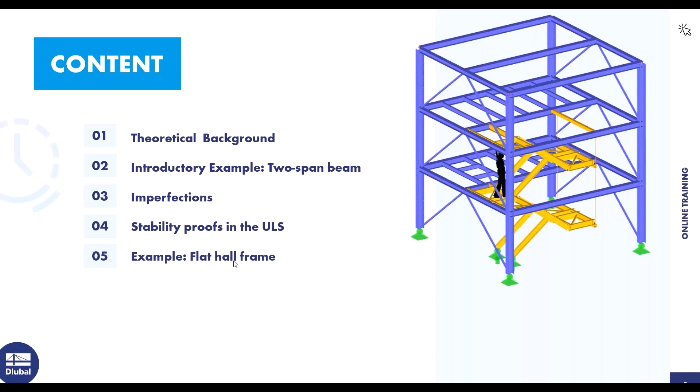That's the content today. At first, I say something about the theoretical background. Then we turn to an introductory example, a two-span beam. Then the next point is imperfections. Then stability proofs in the ultimate limit state. And then we turn to a second example, a flat hall frame. So, okay.

At first, I say something about the products for the design according to EC3. The most important add-on is the Steel Design add-on. With that add-on, you can design steel members according to international standards like Eurocode, AISC, and so on. We design according to Eurocode today. Then there's the add-on Torsional Warping. With that add-on, you can consider the 7th degree of freedom, the torsional warping.

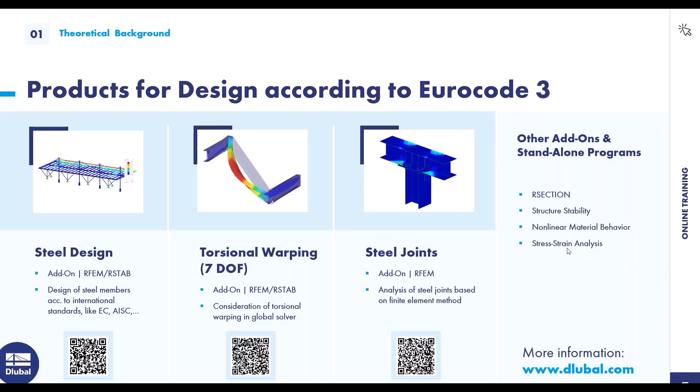Then Steel Joints. With that add-on, you can analyze steel joints based on the finite element method. Then there's the cross-section program, RSECTION. Then the add-on Structure Stability. We use that add-on in the second example. Then there's the add-on Nonlinear Material Behavior. You can, for example, consider a plastic design of steel plates and so on. And then there's the add-on Stress-Strain Analysis.

Okay, then a little insight into the whole safety concept in steel construction. The actions should always be smaller than the resistance. Those are the actions. This is the resistance. And in addition, we have certain coefficients that we have to take into account depending on what type of proof is used. You can see the different coefficients here. And those are the coefficients for the German national annex. And you can see there is for the stability analysis another coefficient, the safety coefficient. But if you select the German national annex, for example, or another national annex, this coefficient is considered automatically by the program. It's automatic. So, okay, then the next slide.

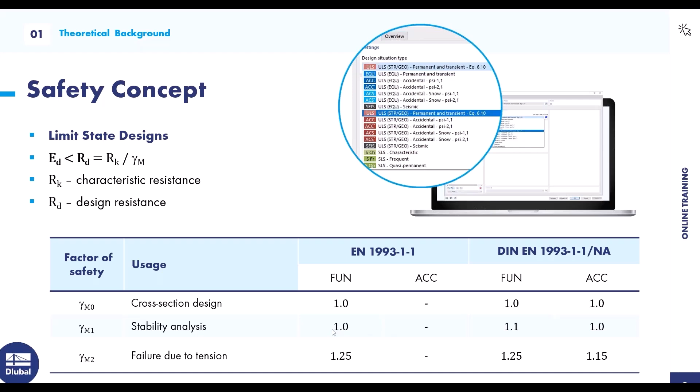Elastic or plastic global analysis. Whether an elastic or plastic calculation is possible always depends on the cross-section classes. There are 4 cross-section classes. The first cross-section class has a high rotational capacity, and this allows a plastic structural calculation. For example, you can consider plastic hinges, but it's not so often used in practice. And the cross-section resistance can be applied plastically.

Cross-section class 2 has a low rotation capacity; this allows an elastic structural calculation. And as with cross-section class 1, the cross-sectional resistance can also be applied plastically. In the first and the second cross-section class you can consider a plastic cross-section resistance. Then cross-section classes 3 and 4 allow an elastic structural analysis, and the cross-sectional resistance can only be applied elastically. For cross-section class 4, only a reduced cross-section resistance, the effective cross-section.

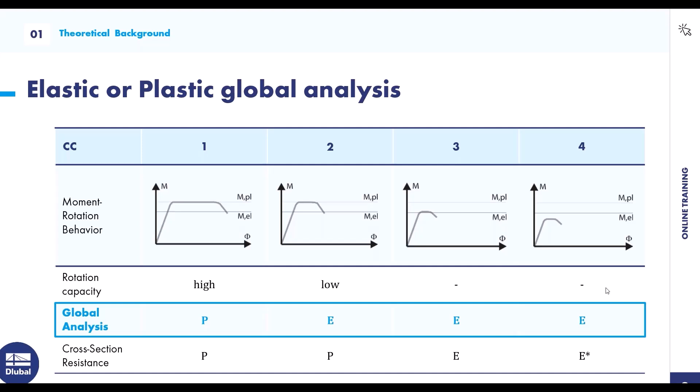That's the first example, the two-span beam, with a field length of 12 meters left and 12 meters right. A beam IPE 550, steel S235, a self-weight load case, and a load case with an imposed load. And we will do a cross-section classification and cross-section design checks, the difference between the elastic and plastic cross-section resistance. We take a look at the design checks: elastic, and elastic-plastic.

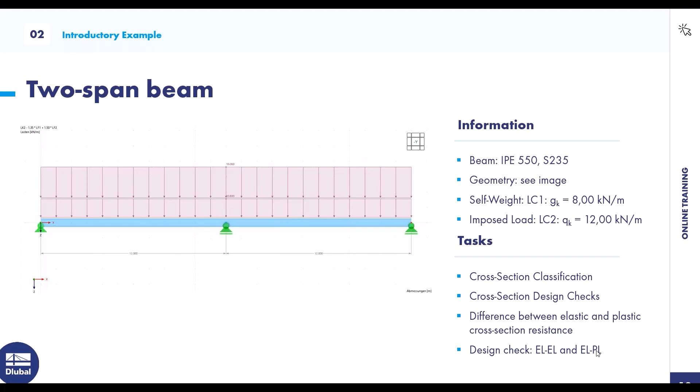Okay, I turn to RFEM. That's the second example. It's already prepared. But for the first example, I model the complete structure. File, New.

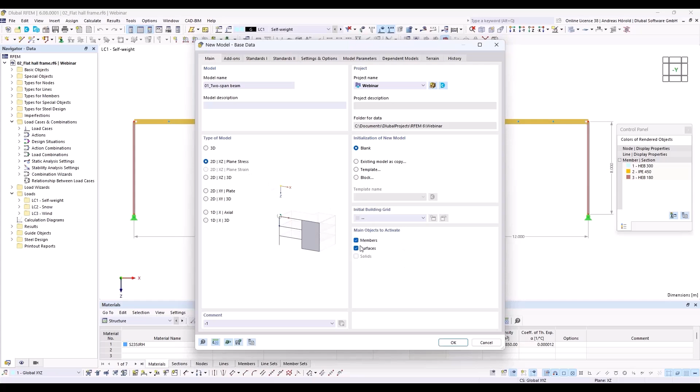So I enter 01 two-span beam. Okay, then type of model 2D is sufficient. We consider only members, but you can also select surfaces. That doesn't matter. And we select the steel design add-on.

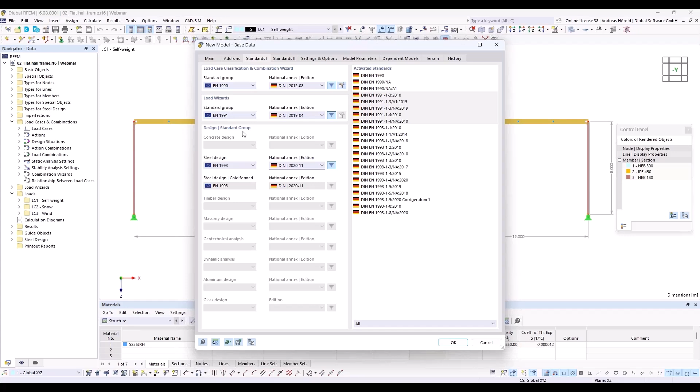Okay, then we need to select the standards. You can see there are, for the load case classification and the steel design, different international standards. We select the Eurocode, and since today we are in Germany here, we select the German National Annex. Okay. We don't use the load wizards, but we use the load case classification and the steel design. We leave the dialog with OK.

So I turn to the view -y, move it a little bit. So the grid is 1 meter. I leave that. If you want to change that, you can click on this here at the bottom, display grid, right click and then edit. And you can change the space for the grid points.

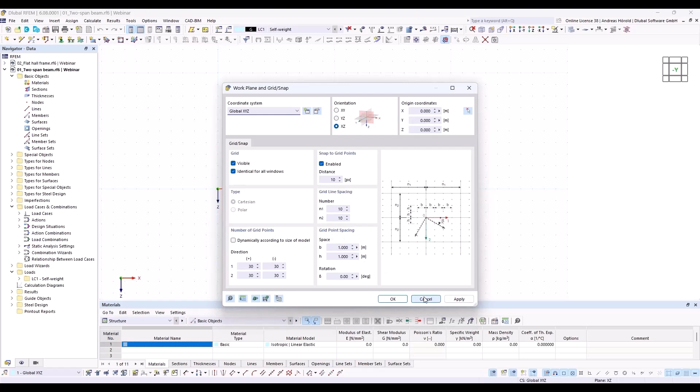So I start with the beam. Here, left above, new single member. I need to define a section. Create new section. I turn to the library. Left above, an I-beam.

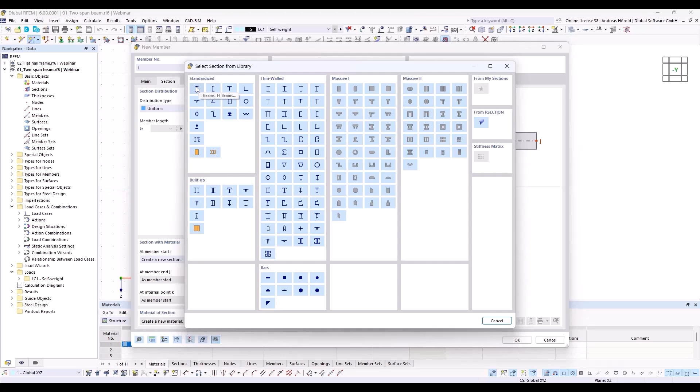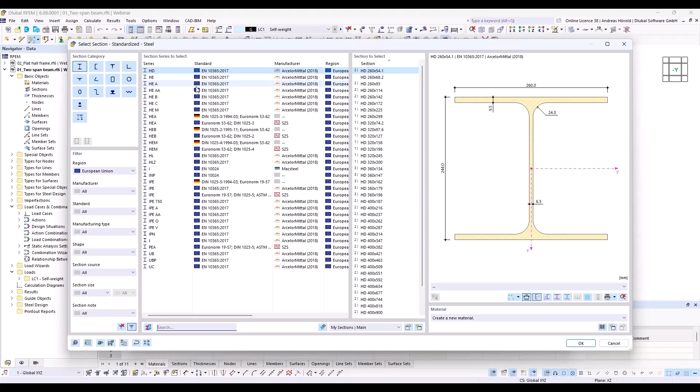If I am too quick for you, that doesn't matter. There is a recording. When you want to enter the structure by yourself, you can use the recording and the finished models. In the next days, you will get an email with the recording and the models and so on, the PowerPoint slides. Just take a look at what I show.

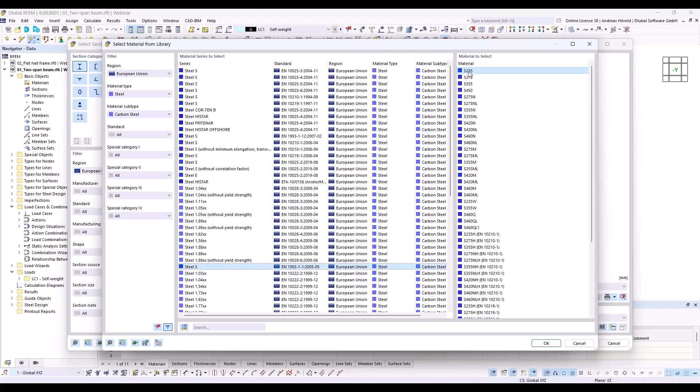That's sufficient. Okay, I select IPE 550, and right at the bottom I open the material library and I select European Union, steel, carbon steel. There are a lot of steel materials. I use the steel material S235. Okay, you can see now the color is blue. That's okay.

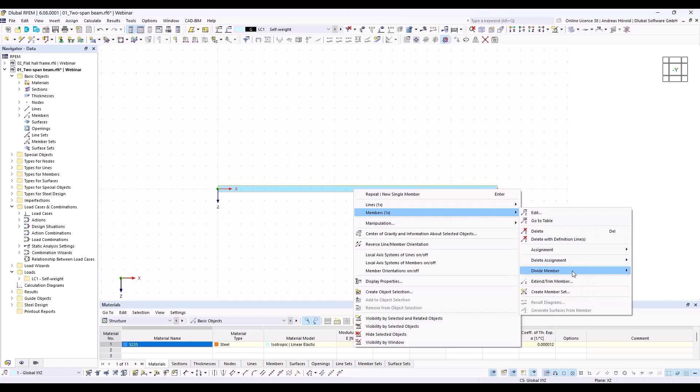So I create a member with a length of 24 meters and I divide the member in the middle with right click, members, and divide member and intermediate nodes. One intermediate node, and I create the node without dividing the member. I select this option here, create on member nodes without dividing member. Okay, there's the node.

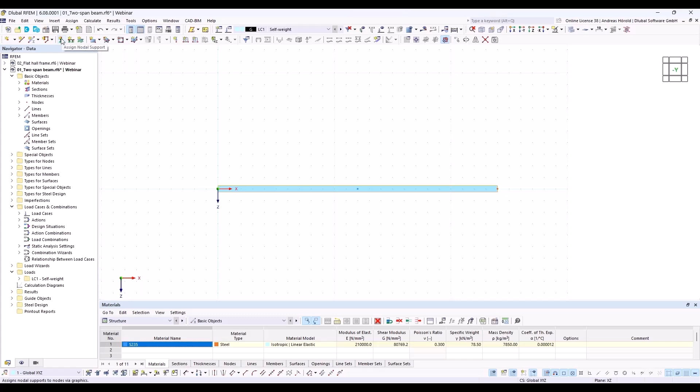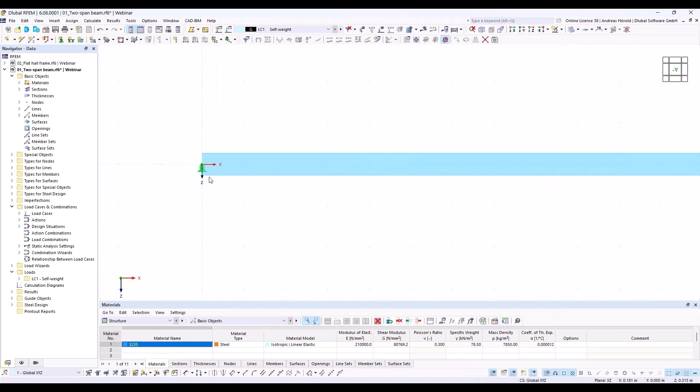So then I create the supports. Here left above, assign nodal support. So I press the edit button to take a look if all is okay. Yes, we support in X direction and in Z direction. Okay, and this node is quite small. With a right click, I can increase the size of the support. Okay, that's enough.

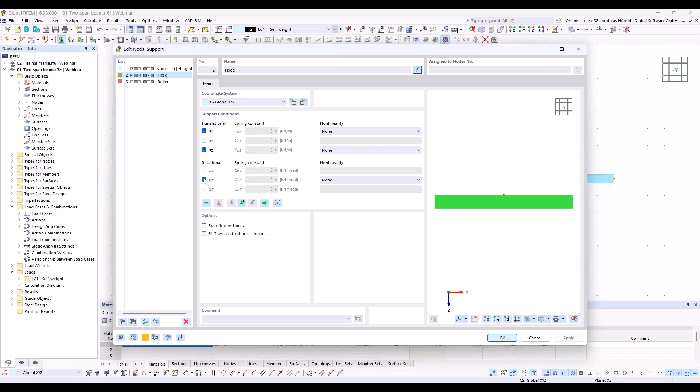So next support, I select the second support and press the edit button. We don't want to fix the rotation for the support, and we deselect the fixing in X direction. We only want to support the member in Z direction. Okay. So that's all for the model.

I create the loads. There's a self-weight load case. I select the edit active load case. The self-weight load case is automatically created for every model. And you can see also the self-weight of the structure is activated. That's correct in our case.

So, and above, this button, new member load. And our load should be a force, uniform. You can see there are different options. And the load direction should be in Z direction, in this direction. And the load magnitude should be 8 kilonewton per meter.

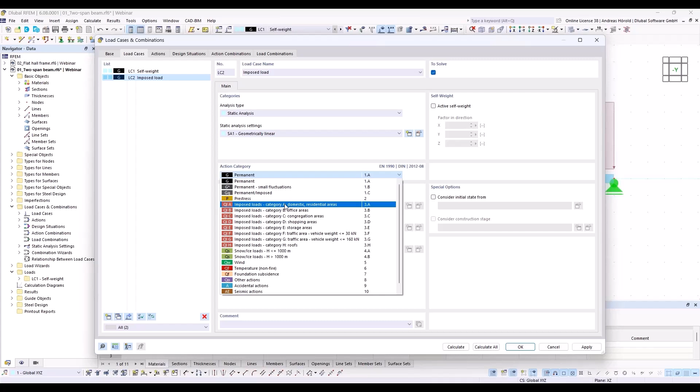Okay. So then I create a new load case with that button. I call it imposed load. And I select the action category not permanent, but imposed loads. Okay. Then I have to create the load for this load case, new member load, and this time 12 kilonewton per meter. Okay. That's all for the model and for the loads.

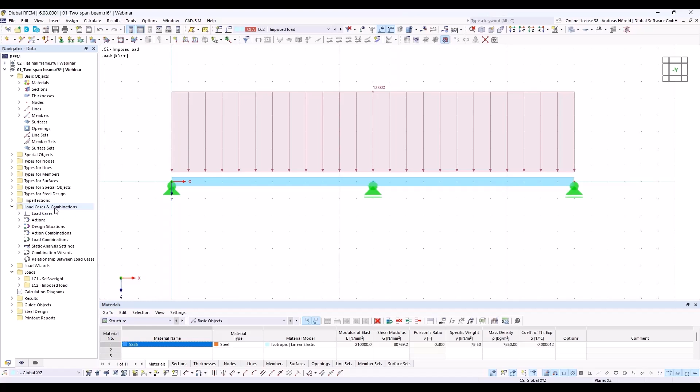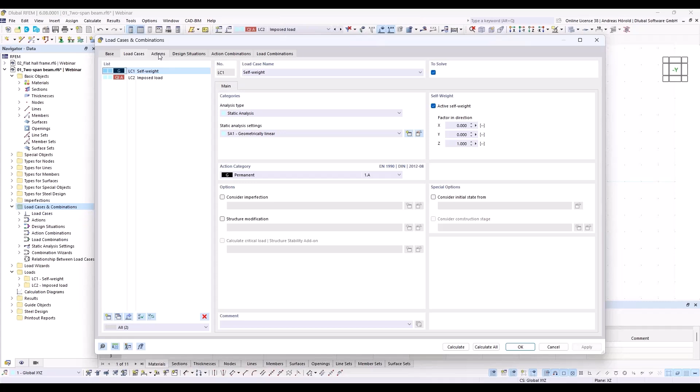I open the load cases and combinations dialog again, this time over the navigator data with a right click. Load cases and combinations. Here are the base data. At the beginning, we selected the standard group Eurocode and the German national annex, and we activated the combination wizard. Those are my two load cases. We've got only two actions.

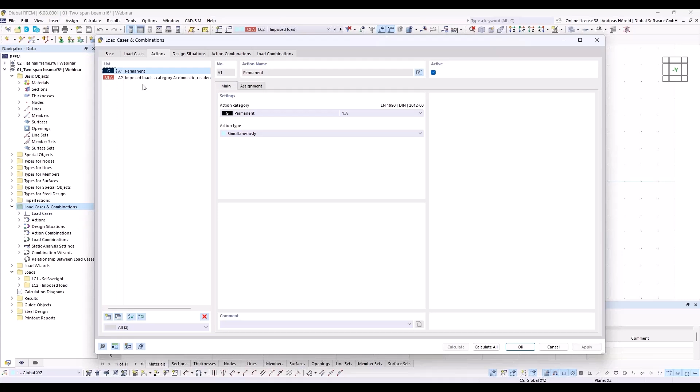Now, that's quite important when you have, for example, 4 wind load cases. Then there's only one action for the wind load cases. And you can combine in the load combinations either wind in minus X or wind in plus X and so on. Okay.

So then there are the design situations. We would like to design only according to ultimate limit state. That's why I delete the design situations for the serviceability limit state. And what's important, we need to activate the steel design. So, and there are only 2 load combinations.

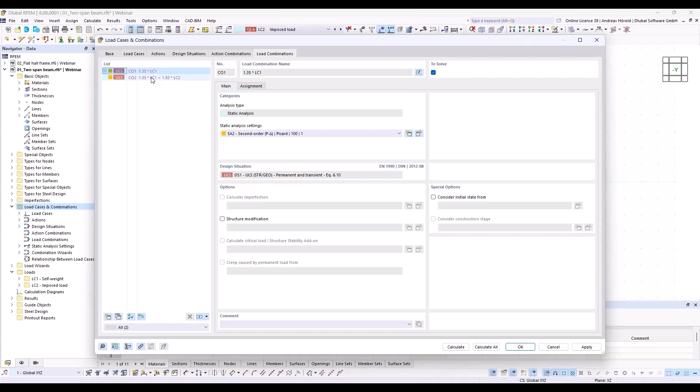And if I turn back to the design situations and to the overview, there are assigned these 2 load combinations for the design situation, ultimate limit state design. So then we can calculate also the steel design.

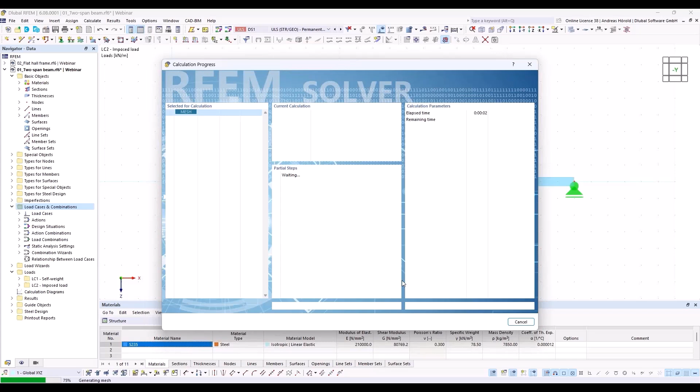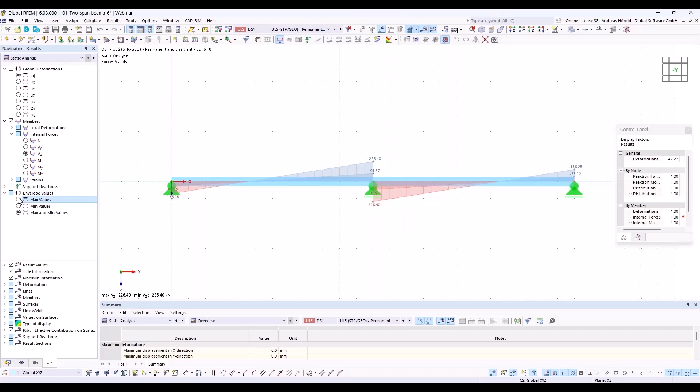At first, we take a look at the internal forces and the navigator results on the left side. The VZ, for example, I can also select only the maximum values, not minimum and maximum. So VZ and MY.

Then we can go to the table at the bottom and to the steel design. An error is displayed after the calculation. This is because we haven't made any steel design settings yet. We are only interested in the cross-section verification here.

We change to the table design ratios and members. There's the section proof for shear and for bending, and you can see a plastic design was done by the program. If I select the line and press this button, design check details, this dialog is opened.

Okay, then cross-section classification. You can see where the cross-section is classified, in class 1. That's why a plastic design is possible.

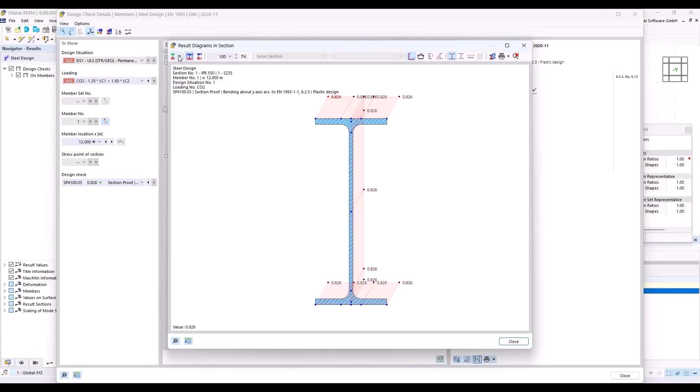So we can also take a look at the result diagram, the design ratio, the stresses. That's the stress in the middle, or over the middle support, and there's tension at the top and compression at the bottom of the cross section.

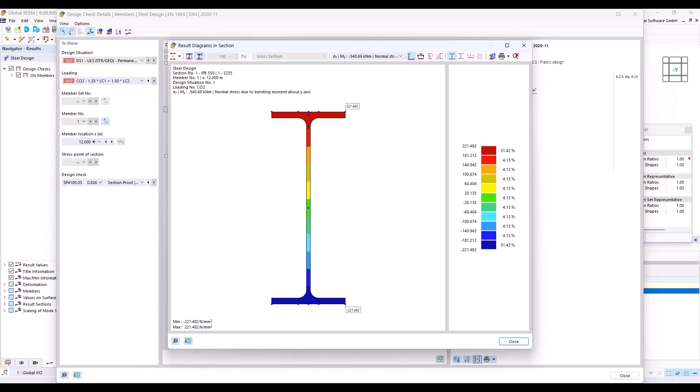So yeah, okay, that's all. Can I show also maybe the cross section information, the stress points, the different sub panels for the cross section classification, the C to T parts. Okay.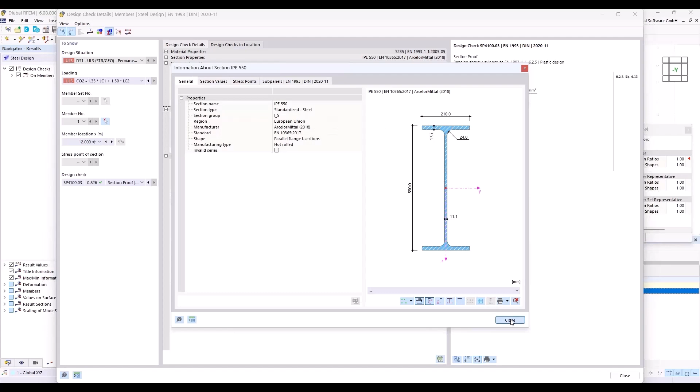That's all. And the same, if you want to check the proof for the shear, you can either press that button or double click on the line, and you can see the equations from the standard.

Okay, now we don't want to do a plastic, but an elastic design. How to do that? I turn left at the bottom to the navigator data. Then I open the steel design folder and the ultimate configurations, and I double click on it.

Then I can, for example, uncheck the stability design. Then this error message doesn't appear, but it doesn't matter. I select this button here: elastic design also for class 1 and class 2 sections.

It's allowed to do a plastic design for class 1 and 2, but in this case, we would like to do an elastic design also for the cross-section class 1. In our case, the cross-section is cross-section class 1.

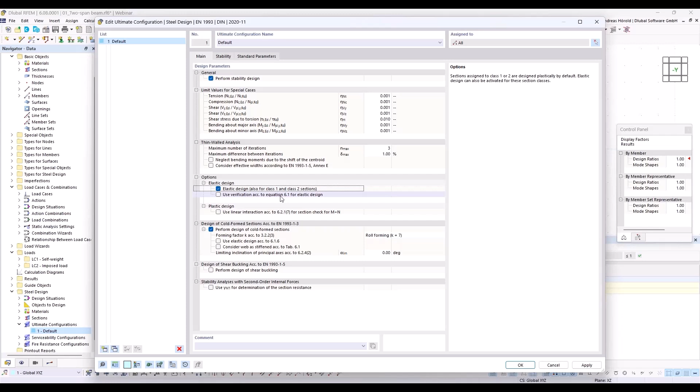Okay, we calculate or rerun the steel design again, and I select design ratios and members. I remember we had a design ratio for the plastic design of 83%, and now we have got 94%, because we do an elastic design.

And if I double click on it, I can see the equation. What you can hold in your mind is that we can do every time an elastic design. We can consider the elastic cross-section resistance. That's what we did in the second step, here.

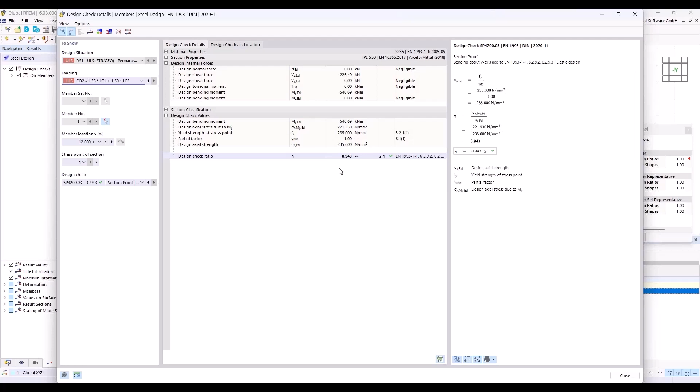So we have now learned how to carry out a cross-section check and how to take the elastic and plastic design into account. At first the plastic design, in the second step the elastic design, because elastic design is allowed for all cross sections. In addition, we now know how to display the design formulas and compare them with our own manual calculation.

Then we turn to the next topic for today: effects of deformed geometry of the structure. In the first training course, Introduction to Member Design, it was learned how the results can differ between the calculation according to the first order theory, the geometrical linear analysis, and the second order theory.

The geometrical linear analysis is an equilibrium formation on the undeformed system, and the second order analysis is an equilibrium formation on the deformed system.

In this example of the cantilever column, this effect can be seen very well on the basis of a slender and a compact cross-section. In the case of the slender column, the increase in the bending moment at the foot point is much larger than in the case of the compact column, if one calculates according to the second order theory. There's no difference when you apply the geometrical linear analysis.

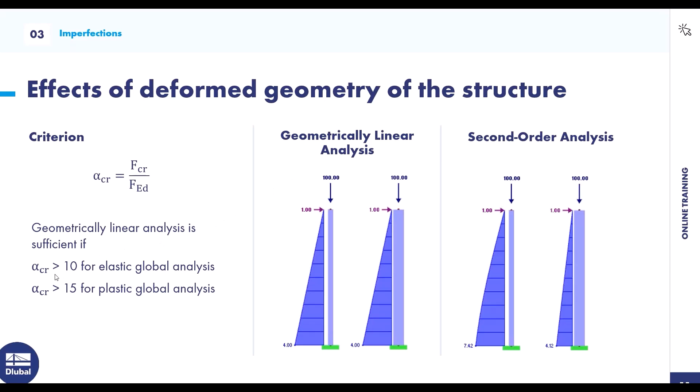So then the next point is the equivalent geometric imperfections. Imperfections are closely related to this topic. In Eurocode 3, these are generally grouped together as equivalent geometric imperfections. What are imperfections anyway? They are production-related deviations in the model geometry and/or in the material properties. On one hand, there can be real misalignments in classic hall constructions or tolerances in production, especially when rolled sections are used.

These imperfections can be summarized as equivalent geometric imperfections. On the left side of the graphic, you can see the initial sway, the global imperfection that can be applied to the structure. And if individual components are to be examined more closely, there is the local equivalent imperfection, for example an initial bow imperfection. This depends on the selected profile, the yield point, the buckling curves, and the proof method.

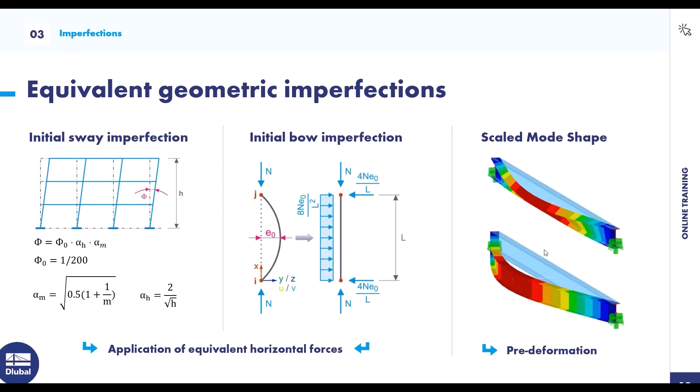What you often use is the initial sway imperfection or the initial bow imperfection, or both. That you can see in a later slide.

When designing steel in RFEM, 3 different stability analyses are carried out. On the left side, there's the classic flexural buckling as a lateral deflection. Then in the middle, you can see the torsional buckling in pure torsion. And on the right side, the lateral torsional buckling as a combination of the two previous proofs.

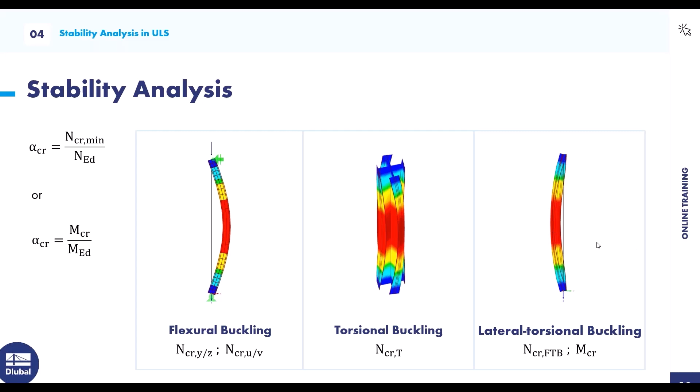Okay, methods for stability analysis. There are 3 methods. Method A: you have to apply a global and local imperfection, and the structure analysis should be done with the second order analysis. Then you can do the cross-section design checks with the internal forces.

Method B: global imperfection means only this initial sway imperfection. So, then the structure analysis is according to second order analysis. And what's quite important, you have to consider the buckling length by the member length, not with a factor. SK is equal to length.

Okay, then method C: structure analysis according to geometrical linear analysis on the ideal structure, but in that case with the real buckling length.

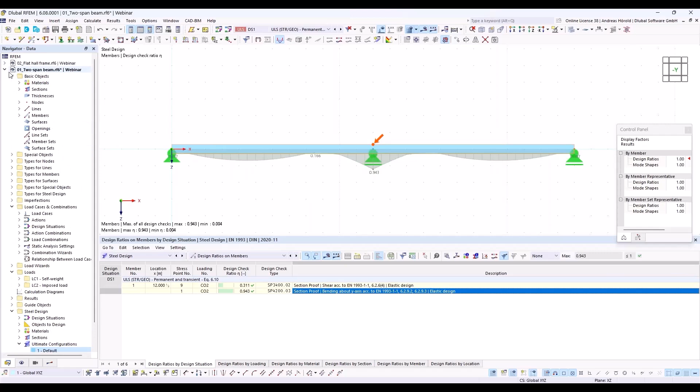So then I turn to the program, to the predefined example.

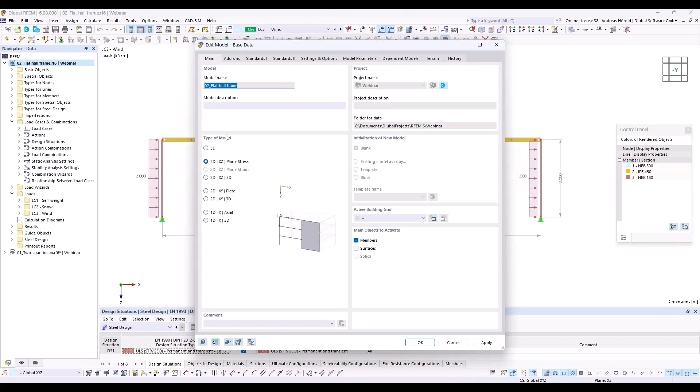Left above, I turn to the base data, a 2D model, and we use the add-ons structure stability, and the steel design add-on. And we select the standards Eurocode and the German National Annex.

And we use the add-on structure stability to check whether we are allowed to determine the internal forces according to the geometrical linear or second order analysis.

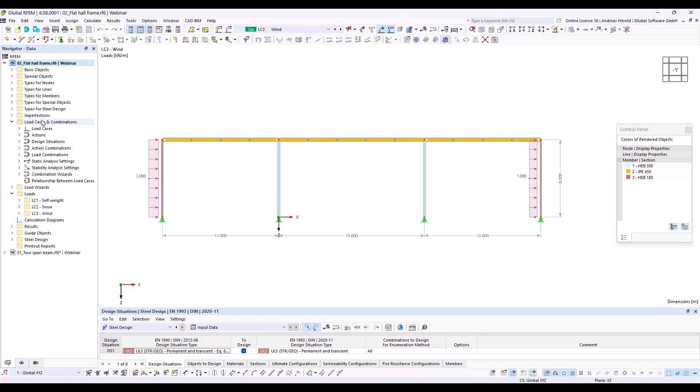That's why we turn to the load cases and combinations, and I go directly to the design situations. I select the geometrical linear analysis, and I edit that, and I activate the stability analysis.

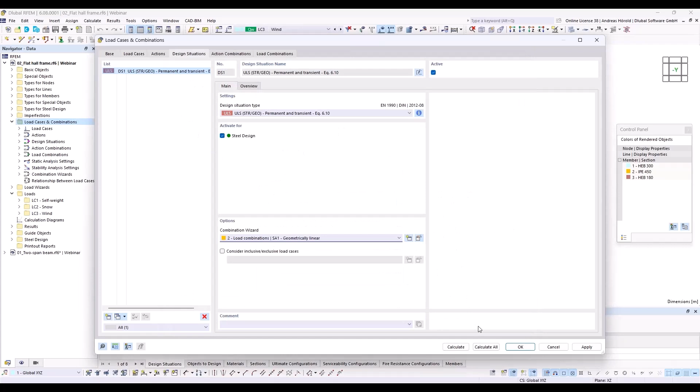Okay, and I run the calculation.

And after the calculation, we see the minimum critical load factor, 6.05 for the design situation, and 6 is smaller than 10. We need to do a stability design by using the second order analysis.

But what I already mentioned, for the stability design using the classic equivalent bar method, means method C, the internal forces can be calculated according to geometrical linear analysis, and buckling lengths must be assigned to the columns.

But for the design of the lateral torsional buckling, the application of the second order analysis is also required with this method. That's why I switched to the second order analysis. For the columns, we consider the effect twice.

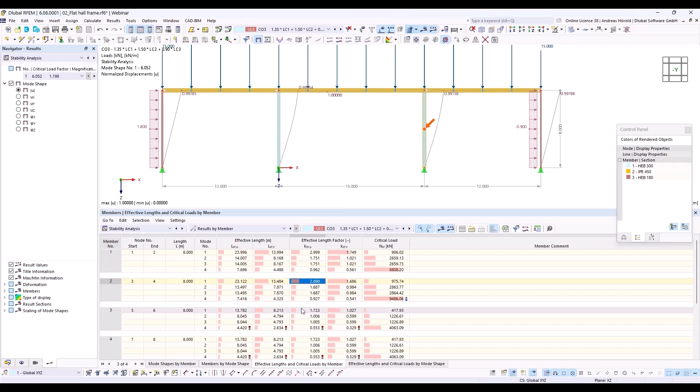So this column has an effective length factor of 3. This column, we apply also 3 for this column. And for the left and the right column, 1.72.

So I turn back to the design situation and we run, or we use the second order analysis.

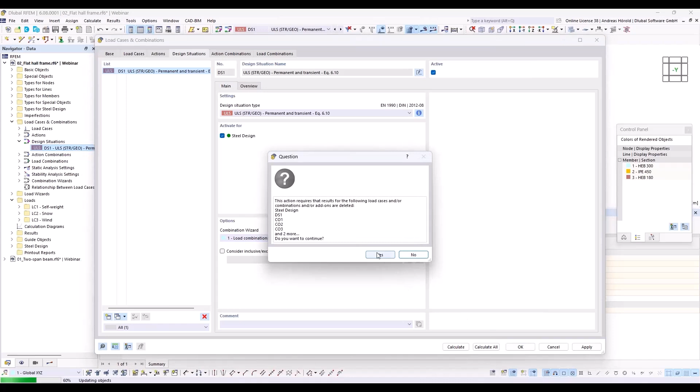Okay, that's okay. So, and now we define the effective lengths, or we assign them to the columns.

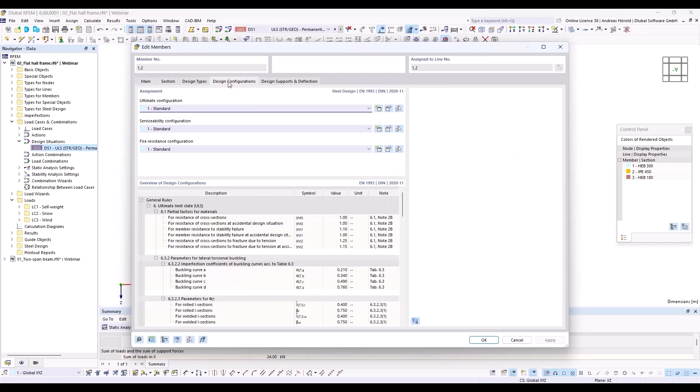I select the inner columns, then I do a right click, members, edit, and I turn to the design configurations and design types, and I define effective lengths.

I would like to mention that you can also import the buckling length from the stability analysis. Now we don't do that in this example.

So then nodal supports and effective lengths. I define the effective lengths of 3 meters, of the effective length factor of 3.

Okay. Then I select the left and the right column. I press the control key. You can see the plus sign. I would like to consider or select both columns.

Then right click, members, edit. The same procedure, design types, effective lengths, and 1.72.

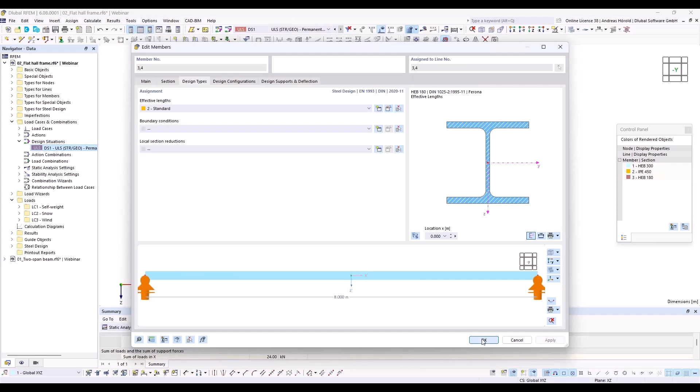Okay. And you can display the effective lengths. Then we go to navigator display, then types for steel design, and I select member effective lengths.

And you can see the factor 3 and 1.72.

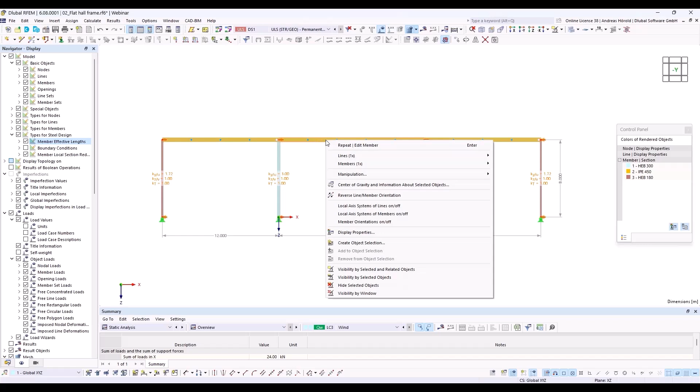So then I select the inner horizontal beam by right click, members, edit, then design types, effective lengths. I create a new effective length.

So this time we would like to consider the horizontal supports, for example, by purlins. That's why I press this button here, select member or member set. I select this member, and the program will detect all these nodes here. Okay, you can see that here. And we would like to fix it in horizontal direction.

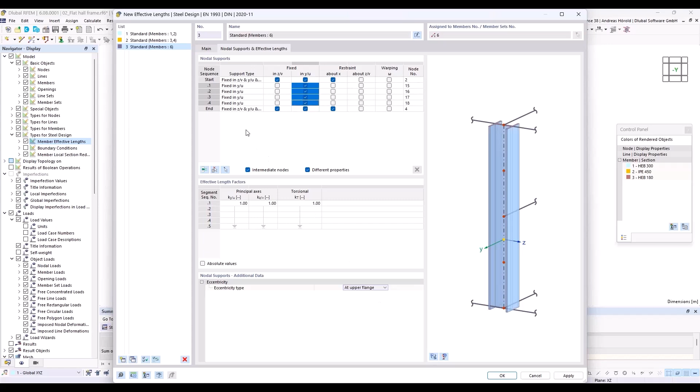And I would like to consider that the upper flange is supported. The purlins lay over the horizontal beam. That's why I select all these lines here, and I define eccentricity type at upper flange. Okay, I can leave the dialog and you can see the supports.

Fork support at the beginning and at the end. And for the inner nodes, there is only a horizontal support at the upper flange by the purlins. So, okay. We need to do the same for the left horizontal beam and the right one. I select both with the Control key. Then members, edit.

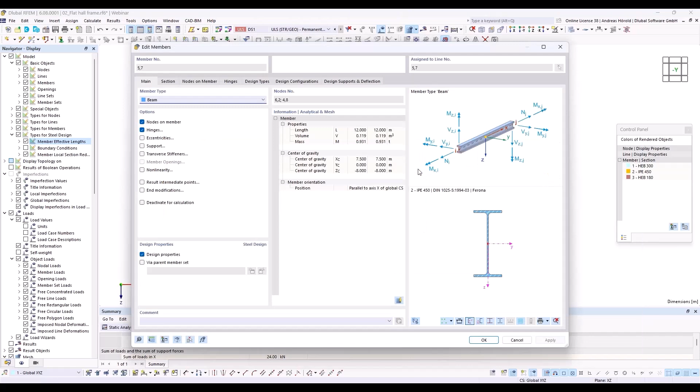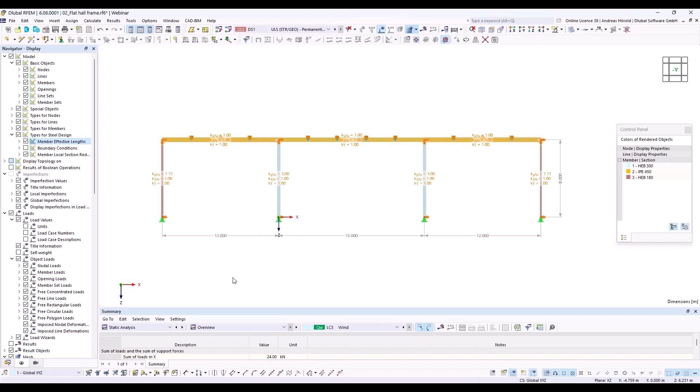And I select the same effective length as for the middle horizontal beam, and you can see the program detects automatically that there are only 3 nodes. You can see 3 nodes are supported and 4 nodes. Okay, then we can run the calculation. I turn to Steel Design and press this button, Show Results, and the calculation starts.

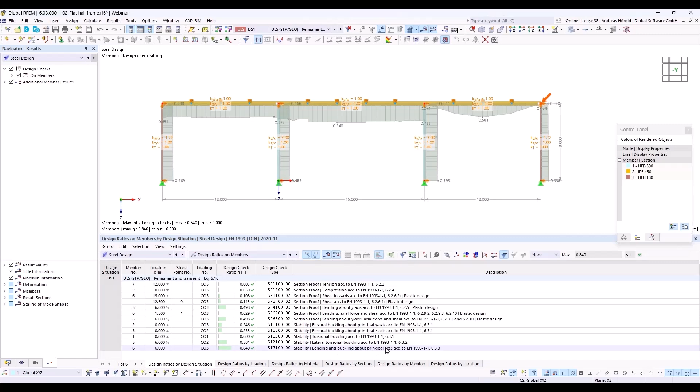So the calculation is done. We have a maximum design ratio of 84%, stability, bending, and buckling about principal axis. So I can double click on it and you can see the design checks, the equations and where you can find them in the standard. Okay, this was the classic structural component design, method C without imperfections, but effective member lengths.

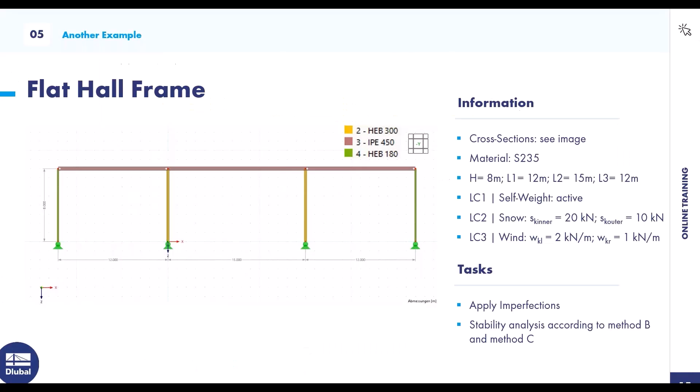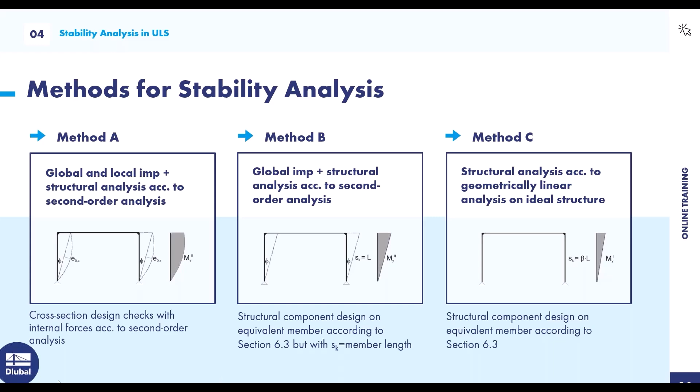Now we want to examine the model using the approach of global imperfections and the structural component design method B. I turn back to the PowerPoint. We did method C with the effective member lengths and without imperfections. And now we define imperfections and I delete the effective member lengths for the columns. We consider SK equal member length. Okay, I turn back to the program.

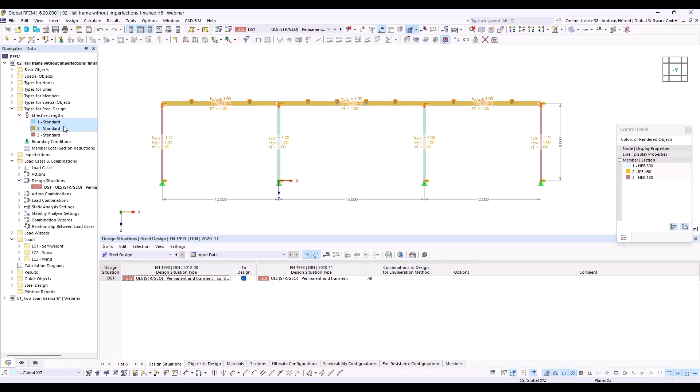Left at the bottom, I turn to the navigator data, then types for the steel design, effective length, or let me save that state, save as, without results. So without imperfections. Okay, I overwrite it. And now I delete the effective member lengths, or the buckling lengths, for the columns. Delete. Okay.

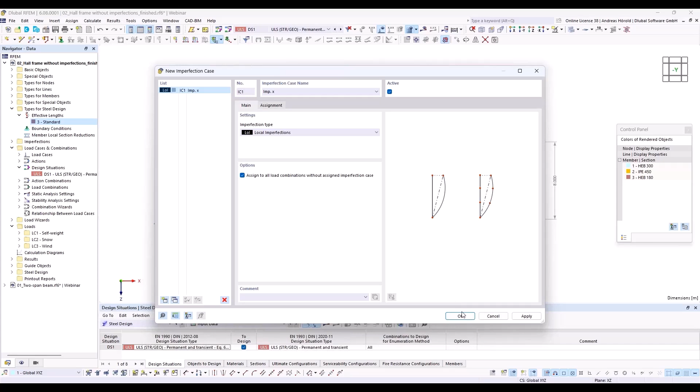And in the second step, I need to define imperfections. So above here, that button, new member imperfection. I have to create an imperfection case in the first step, imp x. We have got imperfections and imperfection cases. You can consider more imperfections in one case. That's why we have imperfection cases and imperfections. That's the case, okay? And now we create the imperfection for that imperfection case.

We define an initial sway, define type is Eurocode 3. The imperfection direction is Z, in the strong axis. Then the basic value is 200. I can measure the structure height, 8 meters. Number of columns in one row, those are 4. Yeah, and the reduction factors are calculated automatically.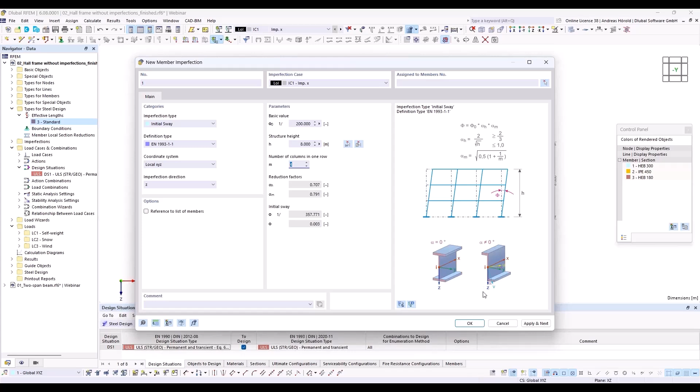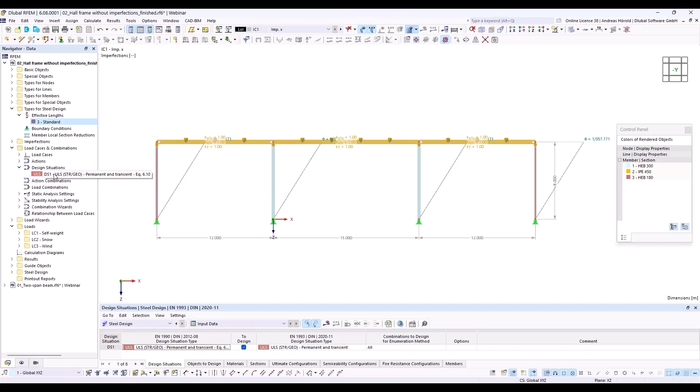Okay, and I need to assign it to all 4 columns. And to display it, I have to press this button above, Show Imperfections. So, and now we can run the calculation. Or before I do that, I take a look at the design situation. Second order analysis. And it must be checked that the program considers the imperfection cases. Okay, now we can calculate all.

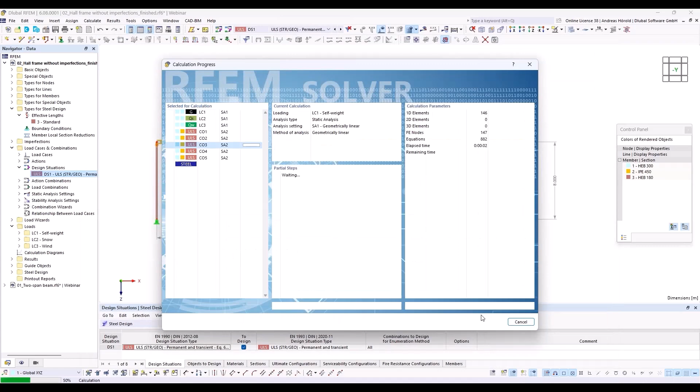So we go directly to the steel design. So design ratios on members. Yeah, and you can see the design ratios. With the method C, we had a design ratio of 84%. Now we've got 86%. That's quite similar, different methods. Okay, yeah, that should be all for today. You learned in the second example how you can apply the method C in the first step, and then with imperfections the method B in the second step.